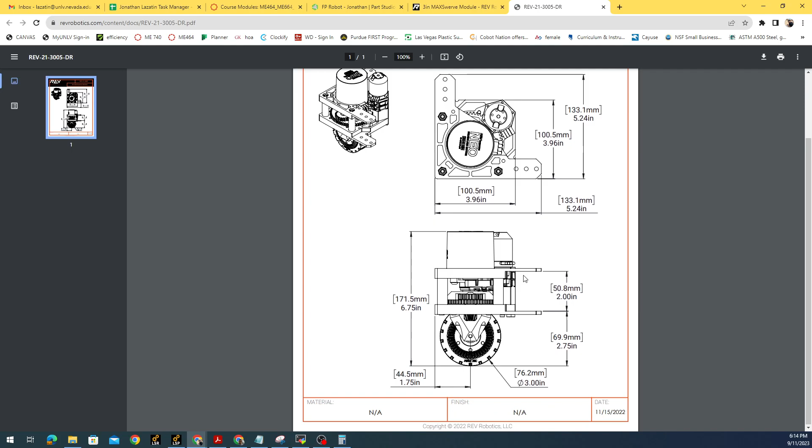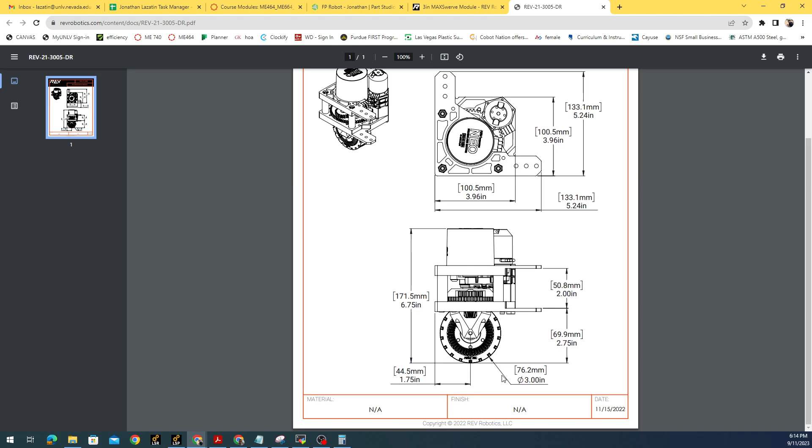Let's go to the drawing, which gives some key pieces of information. Really what I want to know is this height - how high is the drive rail bar compared to the floor. It looks like it's about 2 3/4 inches from the ground. The wheels hold the drive base up, and we've got 3-inch diameter wheels, so I'm going to use that as my baseline.

So what I'm going to do is create a plane off of the top plane, make it 2.75 inches up, and then do a sketch on that plane, looking normal to it.

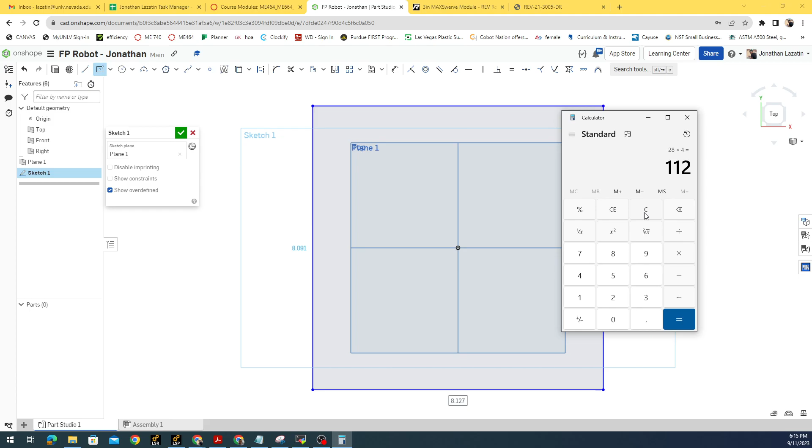I know the rules specify that a drivetrain can't be any larger than 120 inches perimeter. So let's see, if I do a 28-inch side for a square swerve base, what's that going to look like? 28 is one side, multiply it by 4 to get my frame perimeter, so that's 112 - plenty of margin to the 120 max of the rule. So I'm going to do that.

I'll make an equality constraint for these two sides, then make this 28 inches. And that's my drive base.

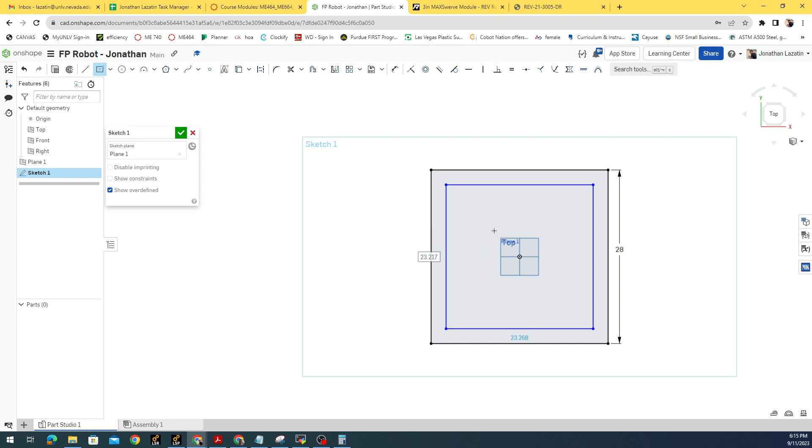I'm going to create another piece interior to that because I know I'm going to use 1x2 for this. I'll make this dimension 1 inch because that's what's interfacing with the module, and then make these equality constraints again.

What's great about this is by dimensioning it this way with equality constraints and the 1 inch dimension, if I want to mess around and make this 26 inches, everything will move accordingly because I've dimensioned the things I care about in this design.

I care about one side of the square drive base, and I care about using a 2x1 with the 1 inch facing top. So no matter what I do - if I make this a whole 30 inches, I think that's the max it can be, since 30 times 4 is 120 - 30 is the max. So I don't want to go any larger than 30. I'm going to stick with 28 for this.

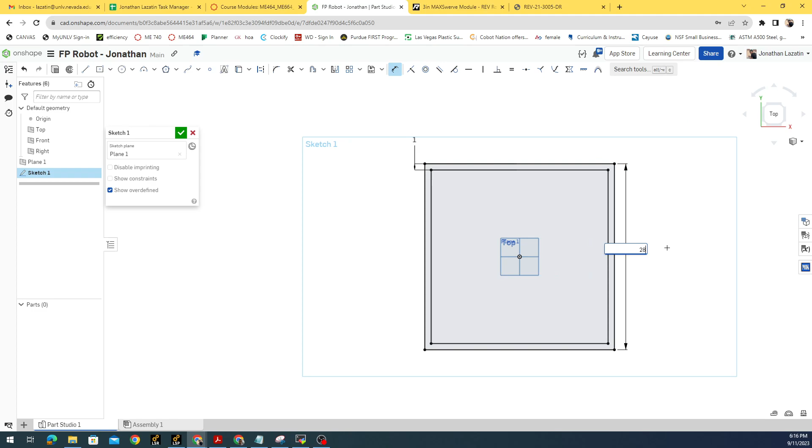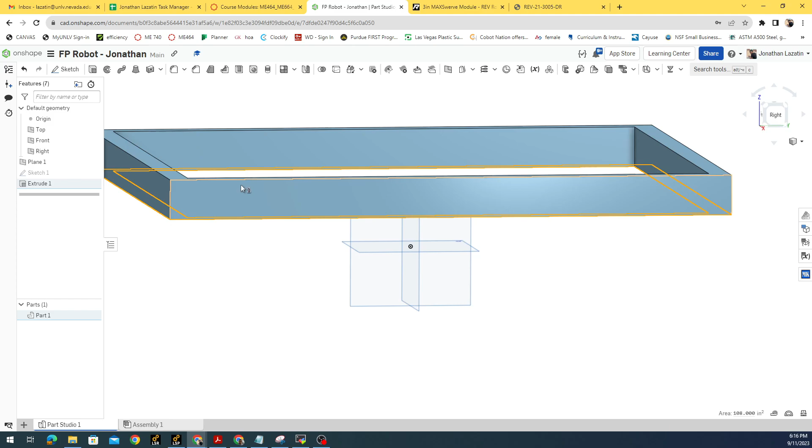Then I'm going to extrude that - it's a 2x1, so I'll extrude it 2 up. I'm not going to do a fully defined wheel, like the motors and plates and everything that go in this corner - I just want a representation of the wheel.

So I'm going to sketch on this plane, the outside of the drive rail, and make a circle that's 3 inches, and I want it to be tangent to this face.

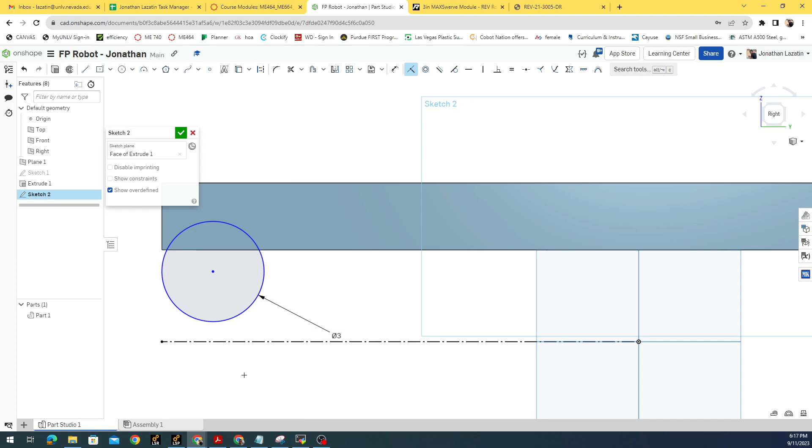I also have a floor based on the origin. Let's go ahead and make the floor go all the way to that line there, and make it tangent to the floor here. That should lock the wheel in place, because it knows the diameter of the wheel, it knows this side has to align with that side from the tangent constraint, and it knows this bottom edge needs to line up with the ground line.

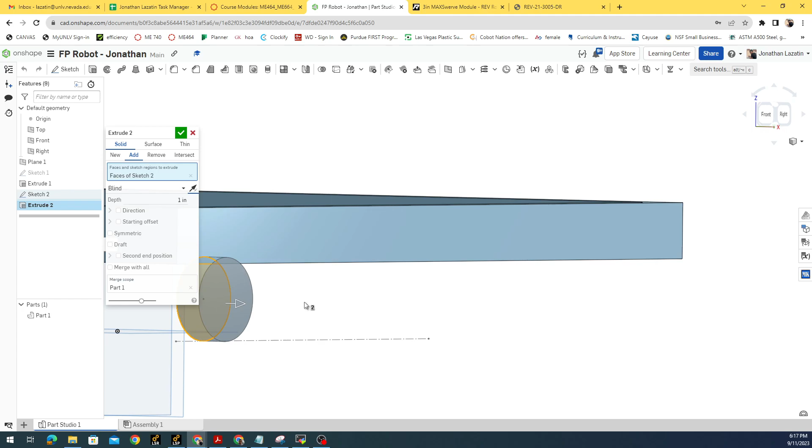And then I'm going to go ahead and extrude that into the frame - 1 inch is fine. It doesn't look beautiful, but it conveys what I need it to convey.

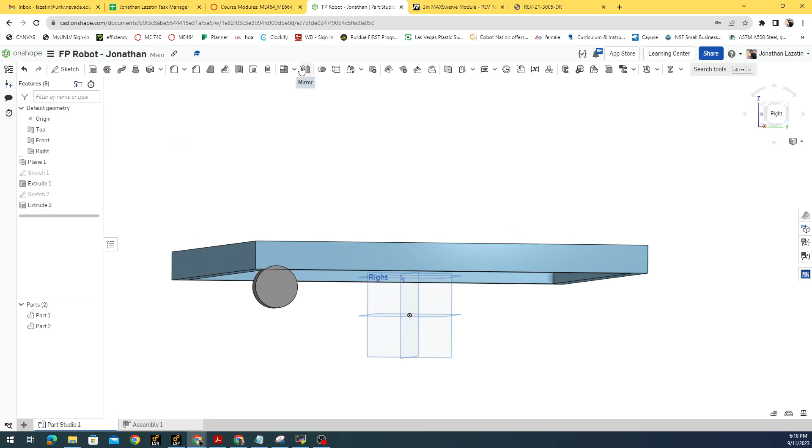What I'm going to do as well is take that extrusion and make it a separate part - new part, boom. Then I'm going to do a circular pattern with the wheel, and I want 4 instances, axis of the pattern.

This is a good place to introduce the idea of a triad. A triad is a generic shape that we put at the bottom of our part studio to help everything line up.

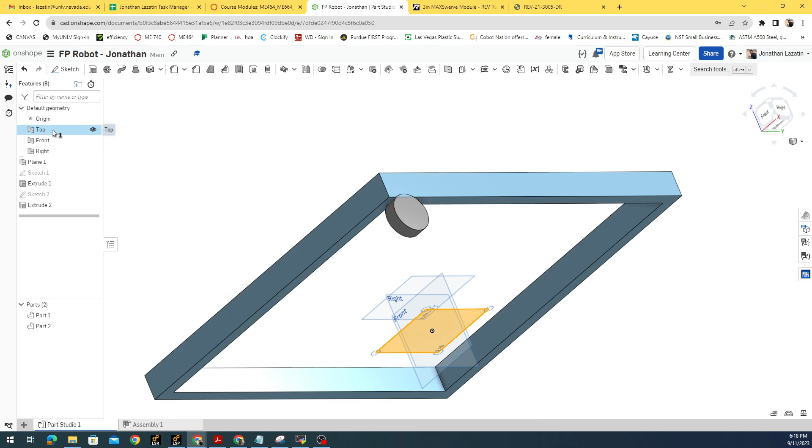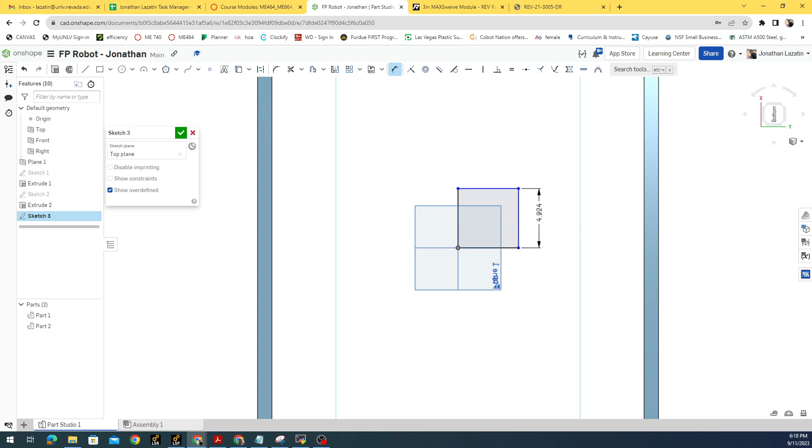On the top plane, I'm going to create another sketch, and just create a square that goes along with these axes here - X positive goes up, Y positive goes to the right based on this axis. I'll go into regular rectangle mode, not center rectangle, hit the origin and bring it out like this, make these two sides equal, and dimension this to 1 inch.

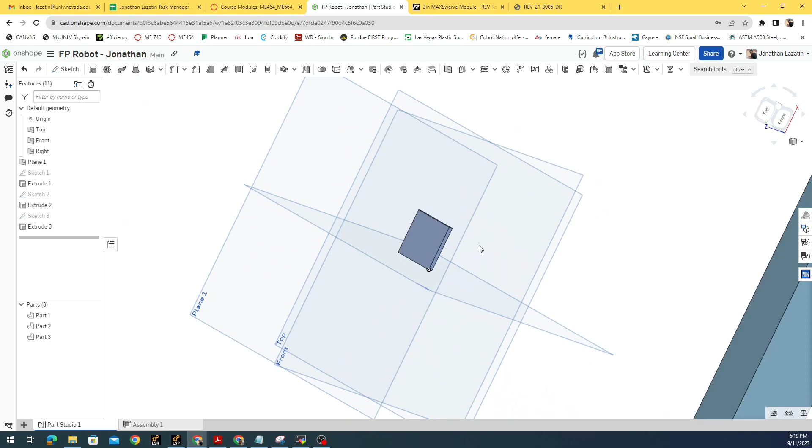Then I'm going to extrude it to 0.1 inch, and it'll become obvious why in a second - now it's a really thin piece. It's actually extruding up, which I don't want, so I'm going to change direction to have it extrude underneath the face, because I want the top of this piece to be pretty much exactly the same level as the top plane itself.

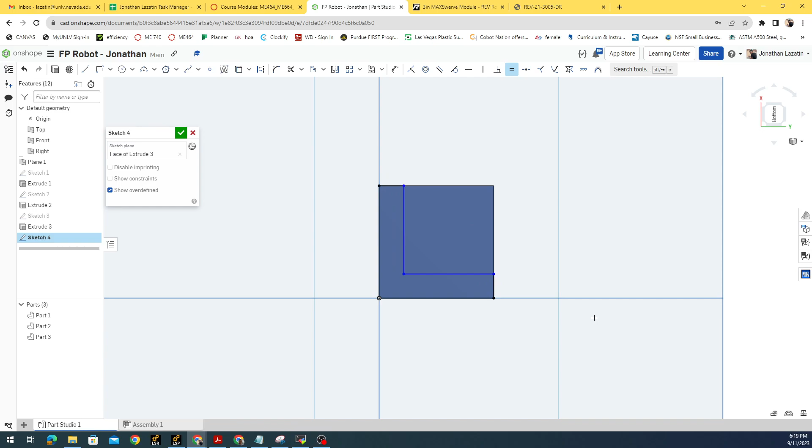Then I'm going to create another sketch on this face, and I'm going to create an L shape, making sure pieces are staying vertical and horizontal. I'm going to make this small line segment equal to this small line segment, and make these 0.1 as well.

Then I'm going to extrude this L piece. Notice the L piece is the same as my axes, the positive X and positive Y axes, and I'm going to make it go up 0.9 inches. That creates this box here, made such that each of these planes are perfectly lined up with the front, top, and right planes of the Part Studio, as well as this edge and this edge being perfectly lined up with the X, Y, and Z axes—Z being the negative direction, X and Y being the positive direction.

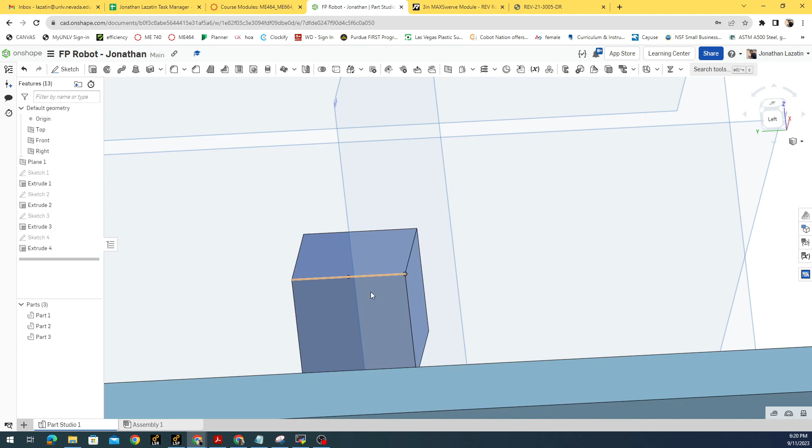So again, when I go back, I'm going to rename this piece as Triad, just so I know which one it is. I could also do the same thing here too. This is good practice—rename your parts as you make them, so you don't lose which part is which. Drive base, and this is drive wheel.

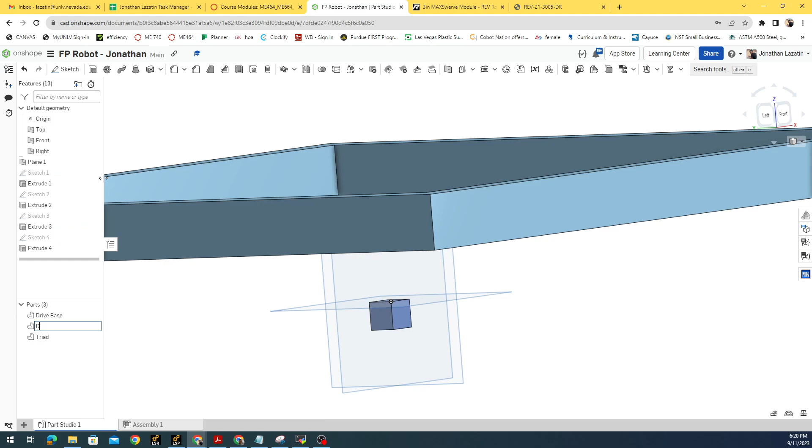So what I'm going to do now is go back to doing that circular pattern. The pattern is going to be the drive wheel. Axis is going to be the Z axis, and then I have 4 of them. So now I have my sort of drive base for my Fisher-Price model.

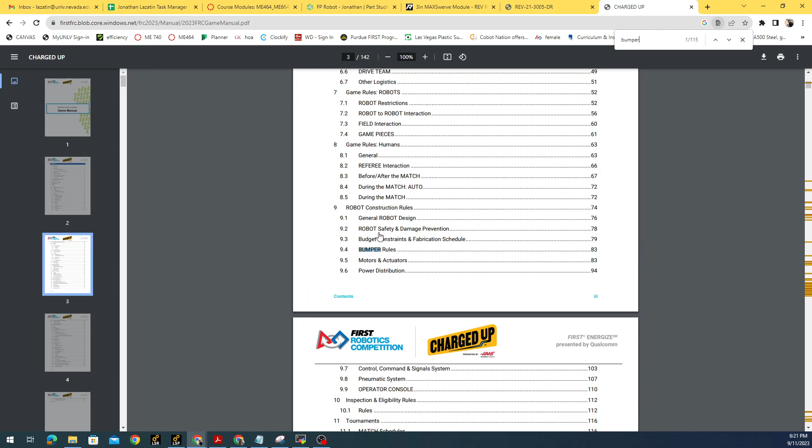Okay, next, what we're really here for is the bumper sweep. So if you look at the rule book, I can go to the 2023 FRC game manual, pull it up, and look for the bumper section. I'll search bumper rules, scroll down, and find this diagram here.

So the bumper is comprised of 2 pool noodles that are 2.5 inches in diameter and a 3/4 inch thick piece of plywood. The height of the plywood equals the height of 2 of these pool noodles. Since these are 2.5 inch diameter, the total height is going to be 5 inches. I'm going to use that information to create my bumper here.

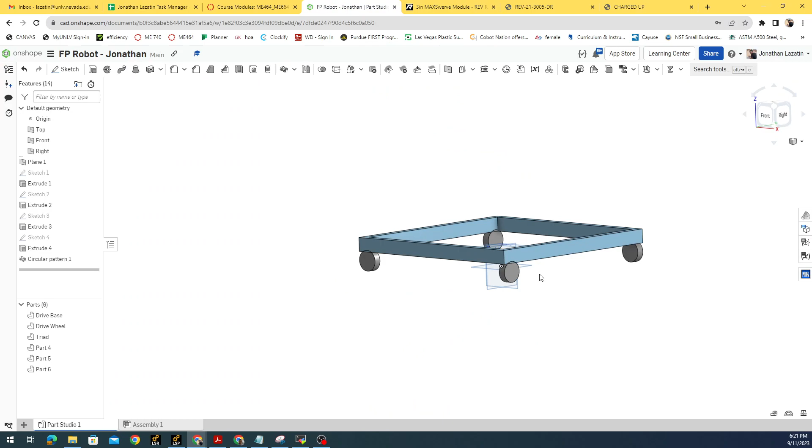So first I'm going to start a sketch again on the right plane, and create a rectangle out in space. I'm going to force that rectangle to be incident to this part of the frame rail, so it just touches each other. Then I'll dimension this thickness as 3/4, just like it says in the rule book, and dimension this height as 5 inches because that's what the pool noodles require.

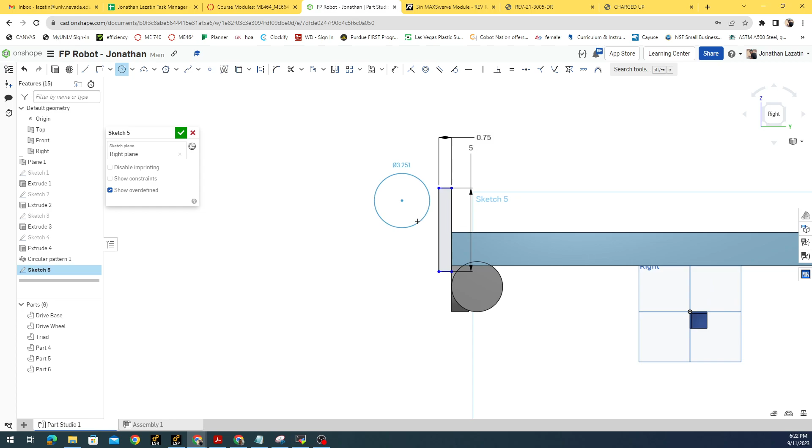Next, I'm going to create circles, 1 and 2. They're going to be equal to each other, and 2.5 inches in diameter. Then I'm going to use the tangent constraint—make them tangent to the plywood, tangent to each other, so now they're perfectly touching only at one point. Then tangent to one of the sides of the plywood.

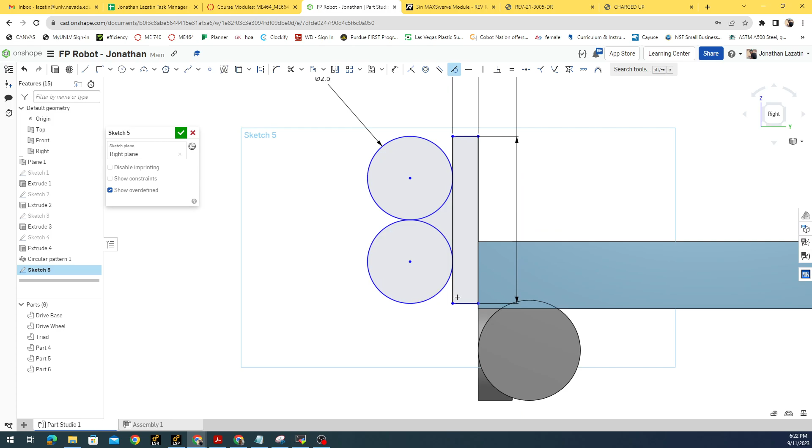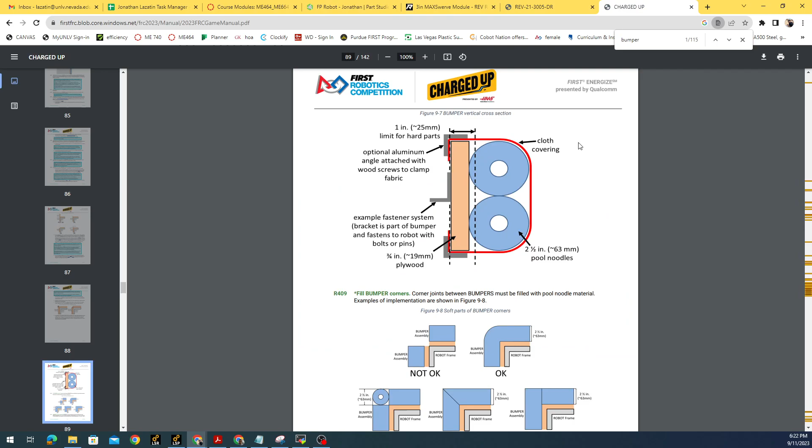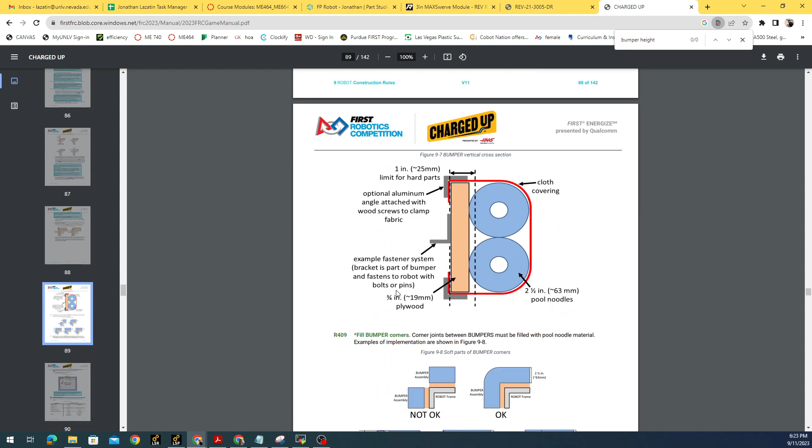So that should lock everything almost in place except for the height of the bumpers themselves. So the last thing is the bumper height, which I believe it specifies here. Bumper height. Oh, I know from previous reading that the max height for the bumpers is 7.5 inches.

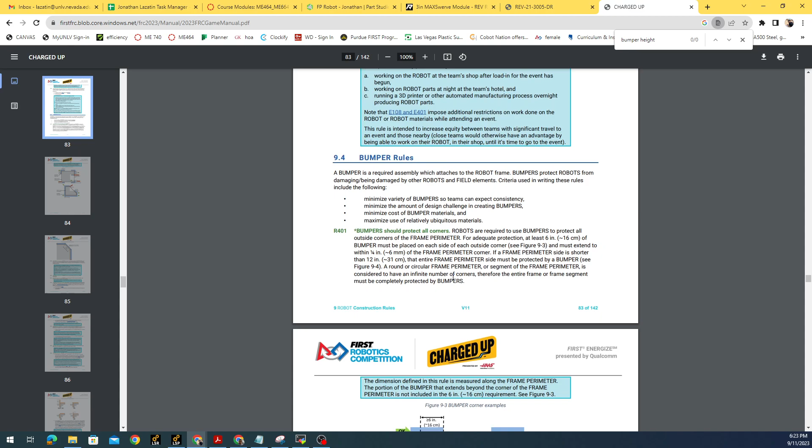I'm just looking for where it says it in the rule book. Here we go: bumpers must stay low. They must be in a volume contained between the floor and a horizontal plane at 7.5 inches. So that just means the bumper height can't go further than 7.5 inches.

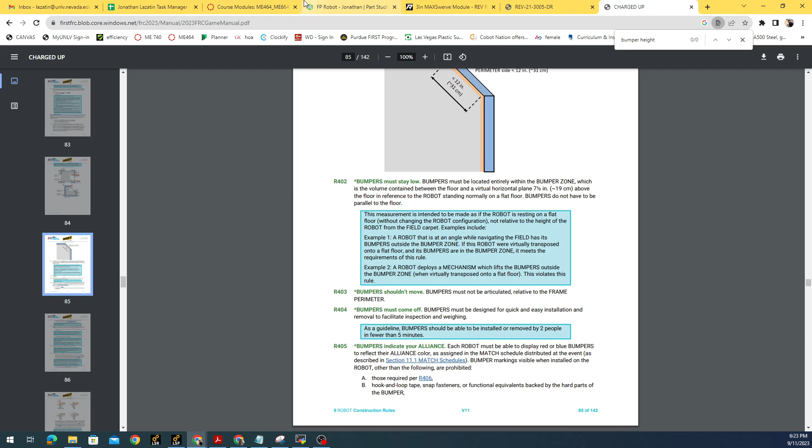So I'm going to give myself a little bit of margin and make my bumper height 7.25. So now it's fully dimensioned—you can see all the lines have turned black instead of blue.

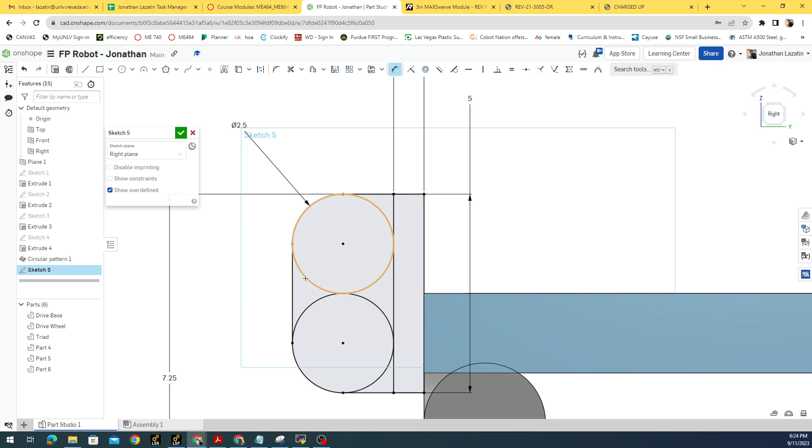Then I'm going to create lines to touch each part of the circle. Boom. And then I'm going to make them forced tangent. There you go—you see after I forced tangent, I didn't have to do both sides because as I made the line pretty vertical, it forced it to be vertical always. So if I were to be tangent to one of these circles, and this is constrained to be perfectly vertical, then with those two constraints, it's also tangent to this circle as well. So I could have done it either way. If I made this a non-perfectly vertical line, I would have to do tangent to the lower circle and tangent to the upper circle. So it could have been done either way.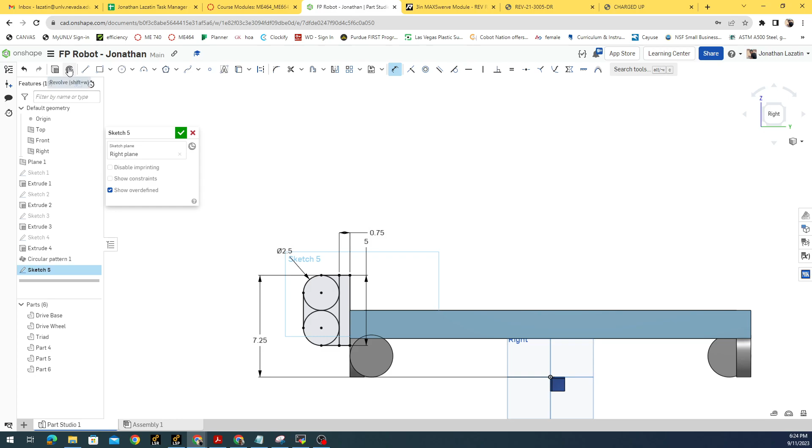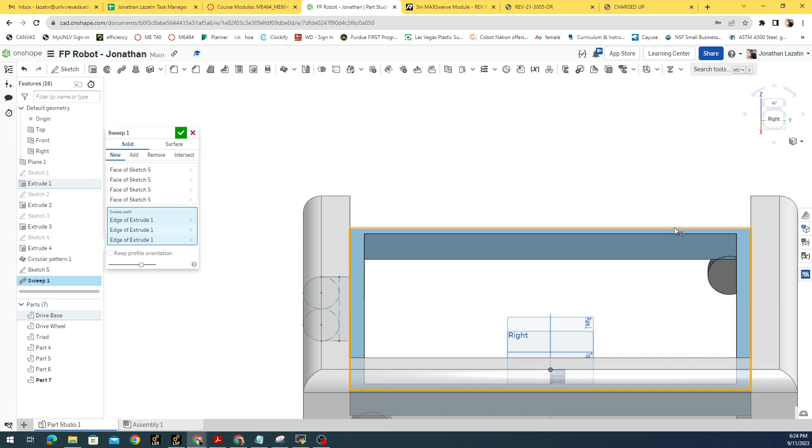Okay, so next I'm going to have to do a sweep extrude. If I get out of here, my sketch is there. I'm going to do a sweep, and the faces that I'm going to sweep are the faces of that sketch. My sweep path is going to be along the outer frame of my drive base. Once I select all four sides of my drive base, I click OK, and now I have my bumpers that are made to spec.

Not a whole lot of time invested in it, but it gets me the appropriate order of magnitude, size, and dimensions to get my Fisher-Price robot up and going. All right, let me know if you have any questions. Thanks.